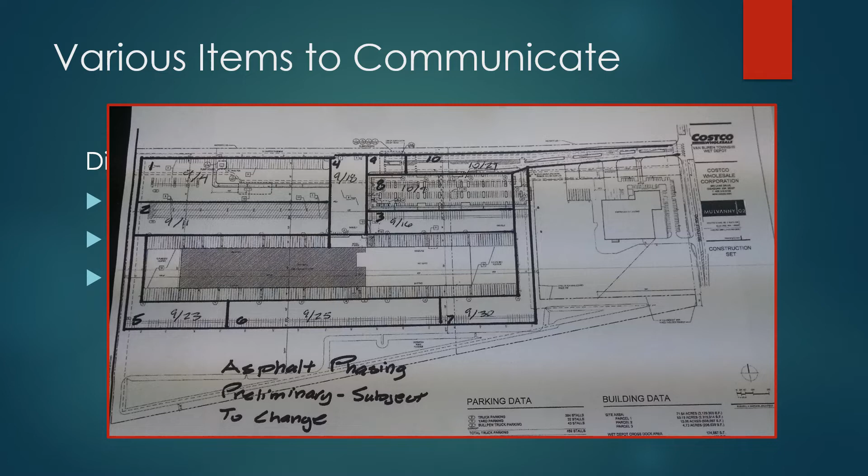Airfield projects are very complex, very complicated. A lot of details on exactly where the jointing plan needs to be between the top lift and lower lifts, as well as where the aircraft is going to be landing, and the wide shoulders, high-speed turnouts, and tarmac.

Our mannerisms are key. An awful lot of people feed off of how you stand, how your eyes are, whether they're focused or glossing over them and looking out to something else. Facial expressions tell so many stories about people. So do pay attention to others, pay attention to yourself as well, and work on proper body language and facial expressions.

Being dictatorial, probably not a good idea. Do as I say, not as I do. We are who we are. We do feed off of other people, though. But rest assured that middle managers and upper managers should lead by example, regardless of your position. I can never possibly state more emphatically that it's really good to lead by example. Don't demand respect. Learn how to command respect, and you'll be very successful in your career.

So again, varying types of motivation. Positive motivational skills is a learned process. Dale Carnegie provides an awful lot of excellent tips on this matter.

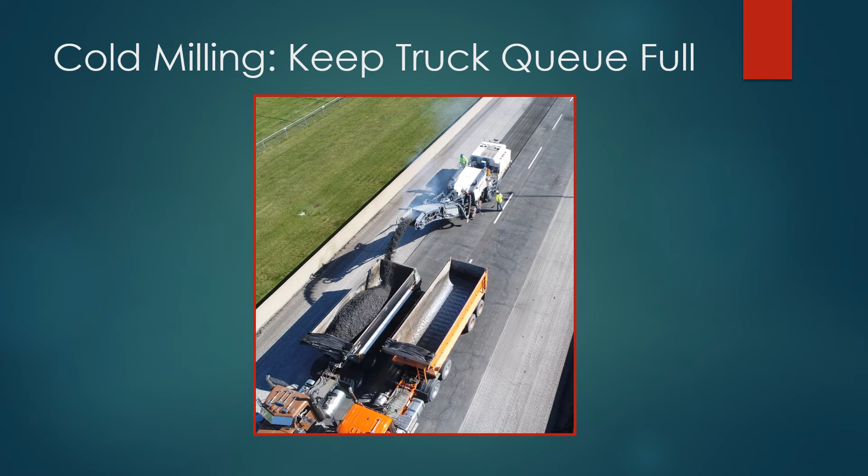To ensure that they kept the cold milling machine moving, they decided to pack their trucks side by side, some might call them in tandem. As the first truck gets filled with the millings or the reclaimed asphalt pavement, which will be taken back to the asphalt plant and reused, the second truck trailer that is empty is all set and ready to accept product, so that the cold milling machine never actually stops. They dial in the feet per minute they want to accomplish. They have a cut width, a cut depth, and from that we can determine how many trucks are required to keep the milling machine moving consistently.

Complementing that is the realization that in our industry, many specifications should really be nominal cuts and not exact cuts for milling. A nominal cut is going to allow us to use grade references on our milling machines, and we will be able to cut the existing surface so that the milled surface has a profile that is a significant improvement from the existing road surface.

Then we're going to follow this up with paving in a similar fashion, and that is how we're going to achieve the smoothest asphalt pavement possible.

So I'd like the engineers out there to remember that if you specify a 1.5 inch milling cut, don't expect it to be exactly 1.5 inches. At the low spots, it should be slightly less, and at high spots, it should be slightly more. I think it's important that on an average daily basis, the nominal cut is 1.5 inches, and we can perform yield checks to verify that.

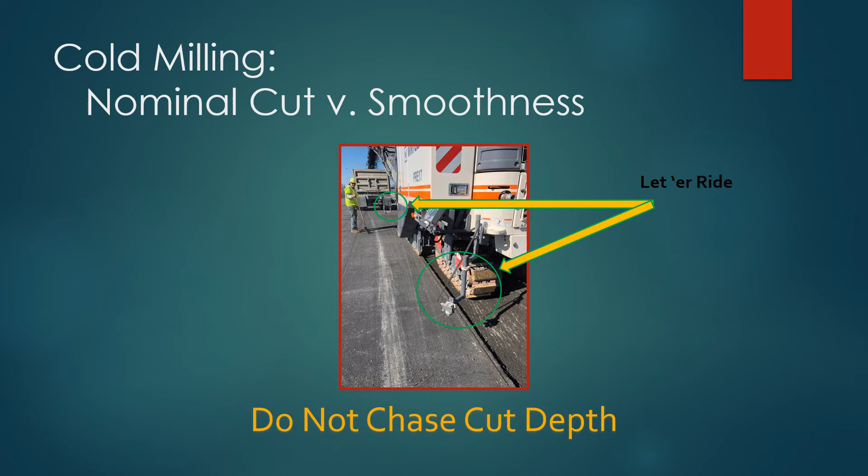So in summary, don't chase the cut depth, chase a nominal cut depth to be the most successful milled project.

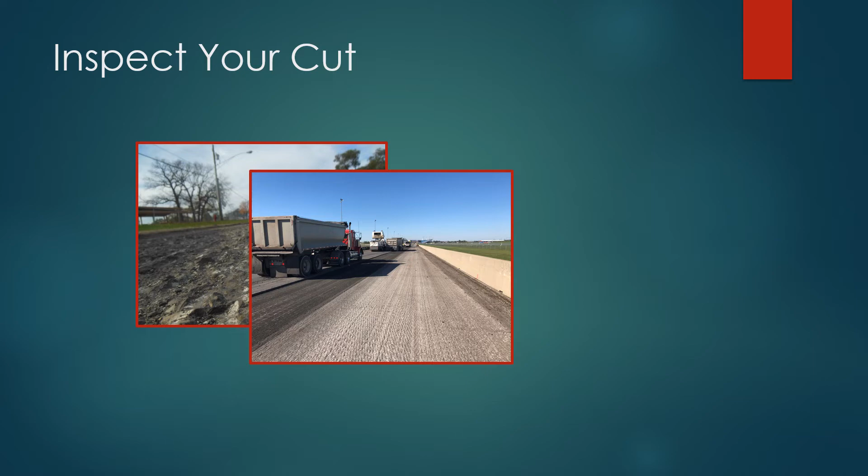This is an improved cut. It's not the greatest, but it's pretty darn good. The rotation of the head is mated extremely well to the motion of the milling machine, and then the trucks are there to move the product out.

And finally, this would be what you would consider an excellent cut. Many specifications around the nation have been developed to require this on mill and fill projects now. Whether it's a finer tooth milling head or the speed that the milling machine moves forward, any number of specification requirements can be stated, but the important part is to get a uniformly cut depth and a smooth ride as we drive forward - not to mention paying attention to the cross slope. This would definitely rate up there as an A quality type of milling project.

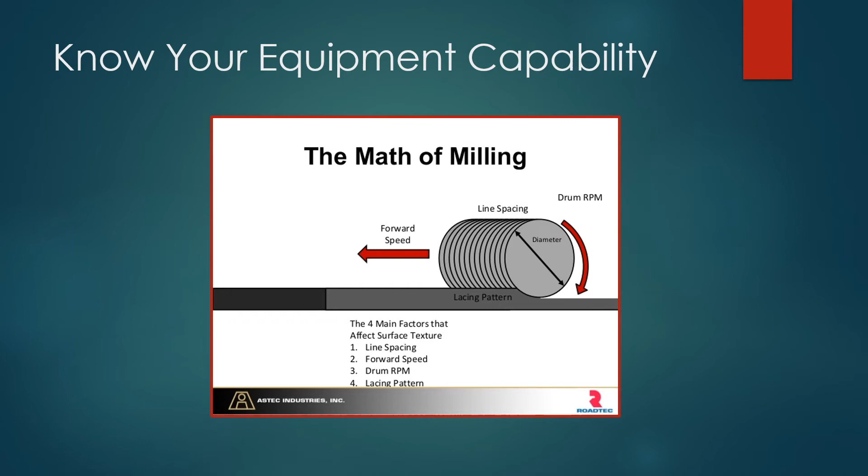This is from Astec Industries, in particular Roadtec. Many of the equipment manufacturers who make milling machines have a very similar slide to share with you to educate people who purchase their equipment. They provide great on-site training with the foreman and the entire milling crew, and they really do stick to the four main factors that affect the surface texture: line spacing, forward speed, drum rotations per minute, and the lacing pattern. Everything in fact ties into how deep you're going to want to cut the mill.

Here's an example, I think this comes from Wirtgen, on feet per minute versus the milling depth, and how fast and effective you can go to have an excellent job, provided you pay attention to the engine speed.

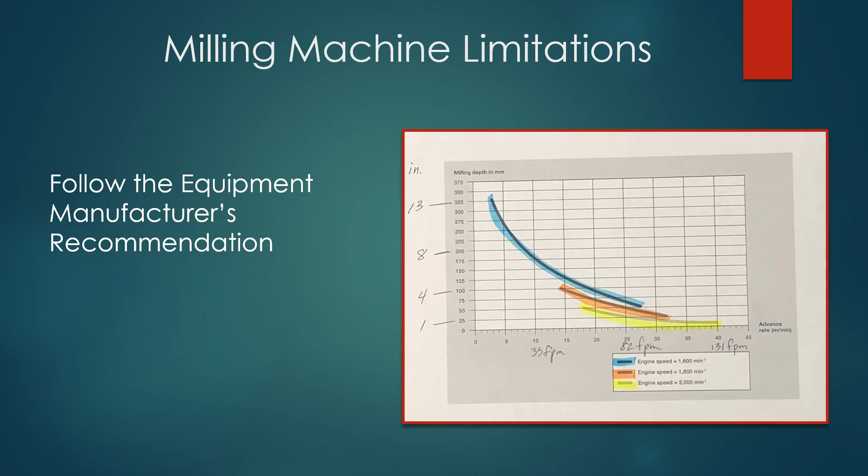Truck drivers: make them a key component. Explain to them the value they bring to the project's success, the importance of a safe truck, properly fueled, properly cleaned, and with a tarp on it.

A truck should stay in the queue and pay attention to how many tons per hour we expect them to bring, or how many loads per day, per shift. The truck driver needs to know this. Some vendors work their trucks 24 hours with different shifts, day and night. Some trucks, unfortunately, will haul asphalt during the day and gravel or clay at night, which leads to nothing but problems. So communicate the need for the truck, the quality of the truck, how long you'll need it, and the condition of the truck bed you expect on every single shift.

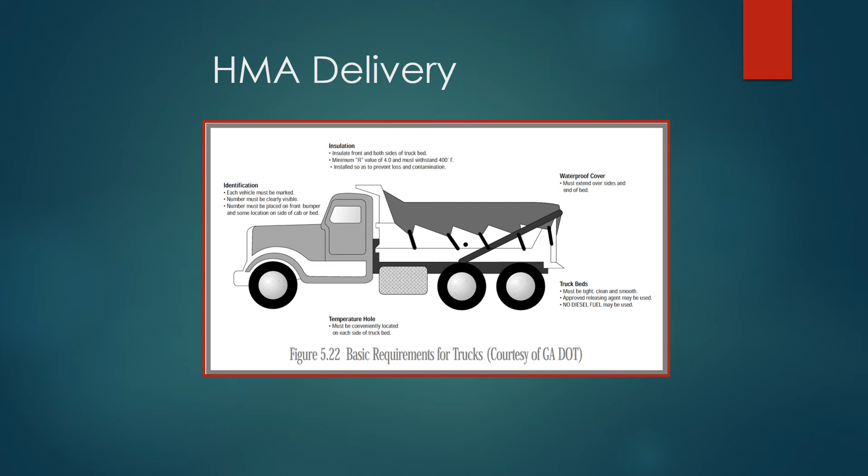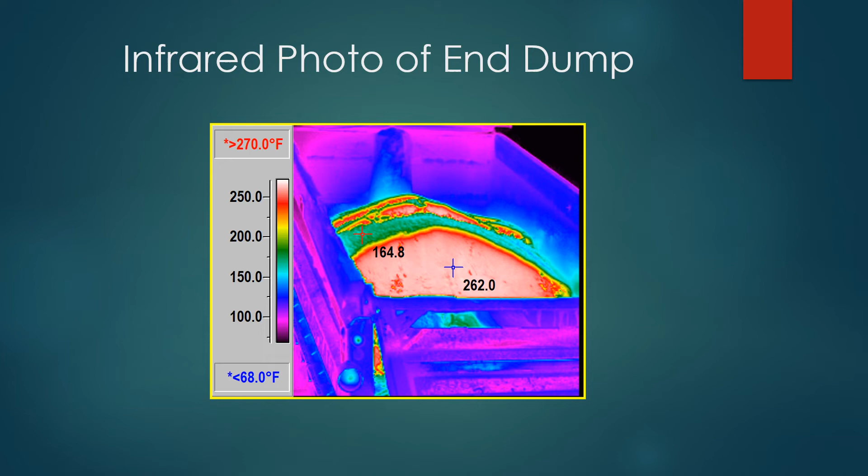A secondary infrared photo shows the truck on the right that wasn't tarped and the effect it has on the temperature of the asphalt mat after it's placed. You can see how those crusted spots travel through the paver and out onto the grade. The roller operator is already set up for failure because the temperature differential will lead to probably 2 to 5% variability in density. This is unacceptable, and it's why we need to continue working with technology, infrared photos to train the crews, and infrared cameras to document good work and pay for work being done.

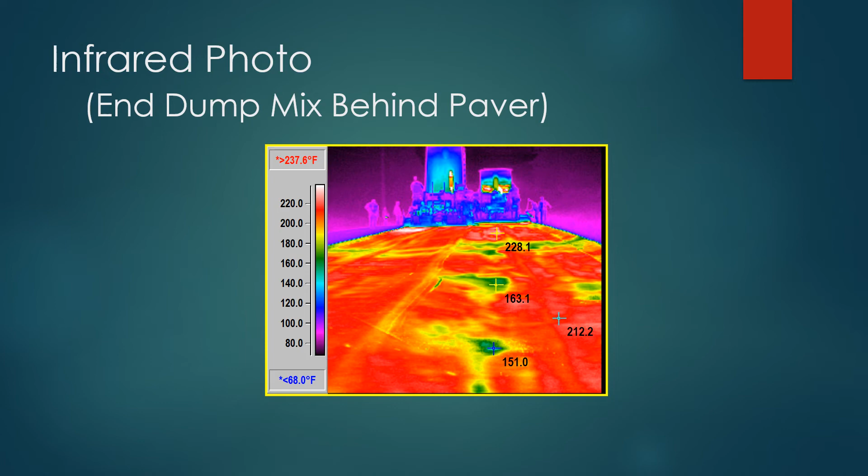That could be 1,000 miles away, and if I have access to the program, I could read exactly what temperature the asphalt is behind the paver. I could read the paver speed, and determine if the paver is cycling, going fast and then stopping between truckloads, because we will pick up a difference in paver speed, and the infrared camera will also pick up a difference in temperature.

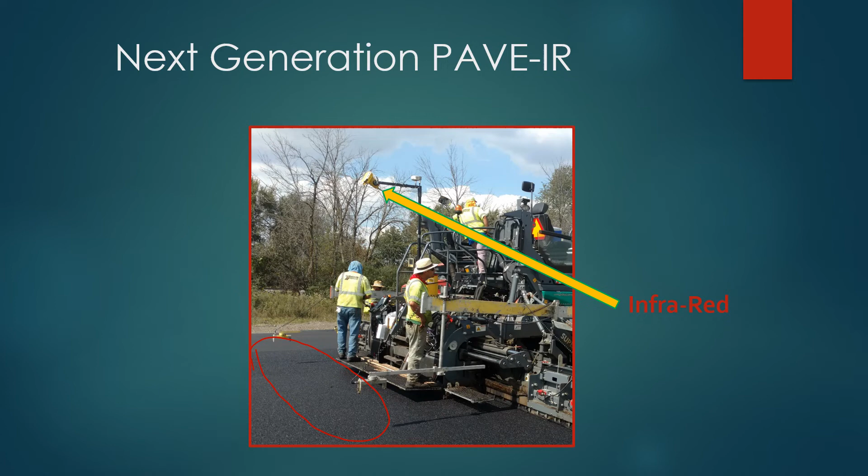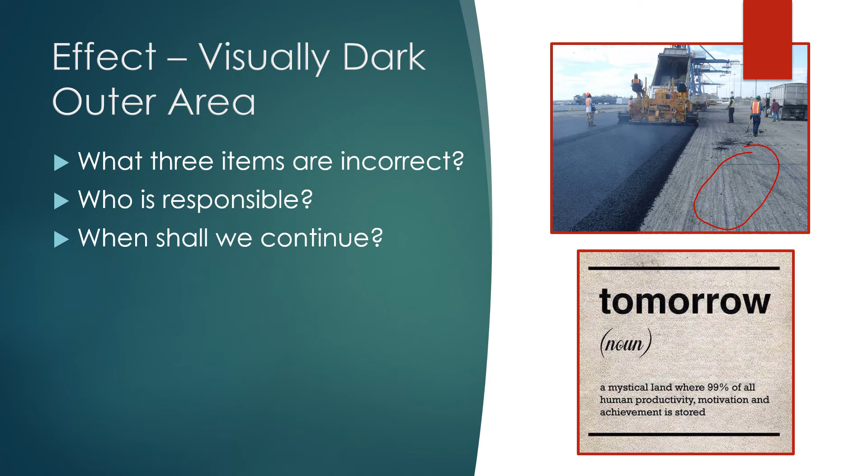What the infrared will pick up is thermal differentials, so this area is probably going to be somewhere around 50 to 100 degrees Fahrenheit cooler than the center of the mat. So we're going to have compromised density, compromised smoothness, an incredible decrease to quality.

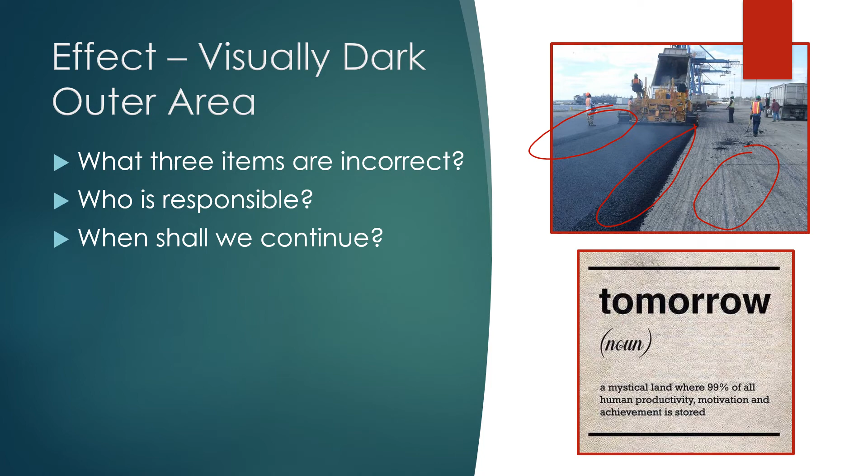Again, this is why new equipment is to be embraced and used. Whether you consider it to be a specification or not is the agency's choice. I think it's really a good piece of equipment for all of industry to at least consider owning and operating, if not on a trial basis, maybe for at least 1 or 2 of your paving crews on an ongoing basis.

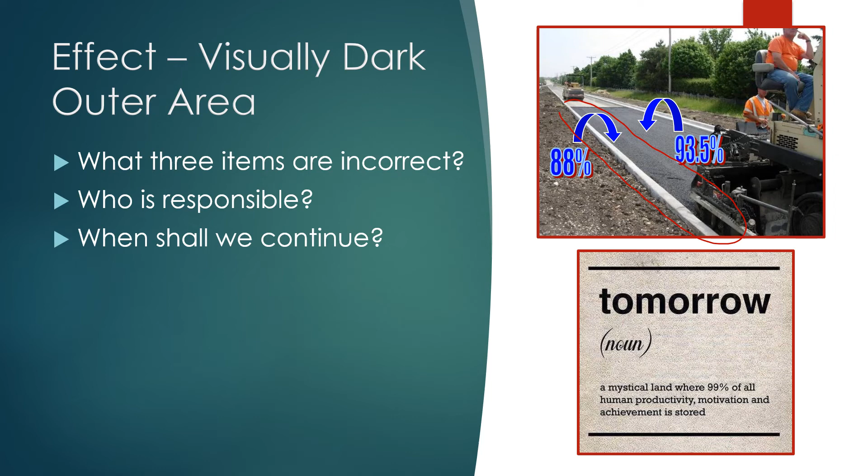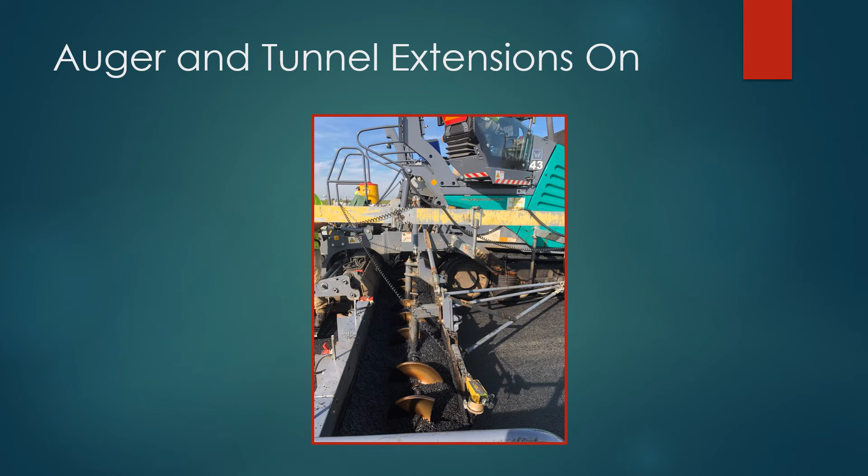Being part of a team is crucial to the success of individuals, and it's also crucial to the success of a corporation. But everyone needs to understand their role, so make sure you develop roles and responsibilities for all your employees. Ask yourself, do they feel respected? If not, how can you improve on it as the leader? Do they feel their contribution is important, or do you brush off what they say?

Think about what somebody's saying. Try to put yourself in their shoes. Close out meetings letting them know you value their input and their comments. Although we may not adopt what's being recommended for this project, we're certainly going to look forward to integrating it into future projects. It doesn't really cost you anything to be a nice leader and to help improve your team. We're trying to help each and every member of our team succeed, and we certainly want our clients to be successful as well.

Decisions are very important, but ultimately there has to be a leader. There might be some crazy ideas that come up, but ultimately a leader has to make a decision whether we're going to do this or not. What's in it for the company? What's in it for the client? In this particular case, the decision was made to give the smoothest pavement possible, to minimize joints, and to get the highest density possible.

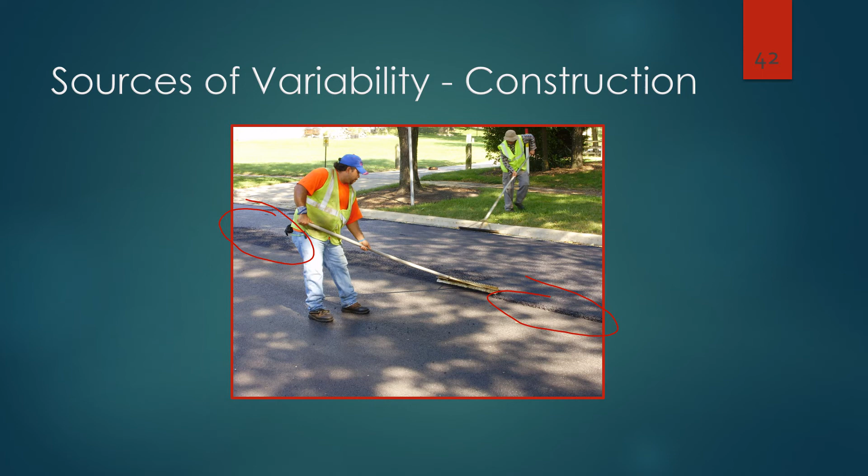In this particular case, the laborer only had to talk to the back end person and say, hey, put your end gate down, squeeze your end gate in, and let's line this thing up better with the existing mat so that we get an excellent paving seam.

This is a perfect outcome as far as I'm concerned. This contractor is doing an excellent job. The way they're successful is their first pull was straight and true, and you can see that off in front up here. Because of that, the rake is exactly where we want to see it. The lute should be used only when necessary at structures, and sometimes when we have slight undulations in the pavement, or maybe once in a while we have to crowd the material back. This is exactly what you want to teach your crew - less is more.

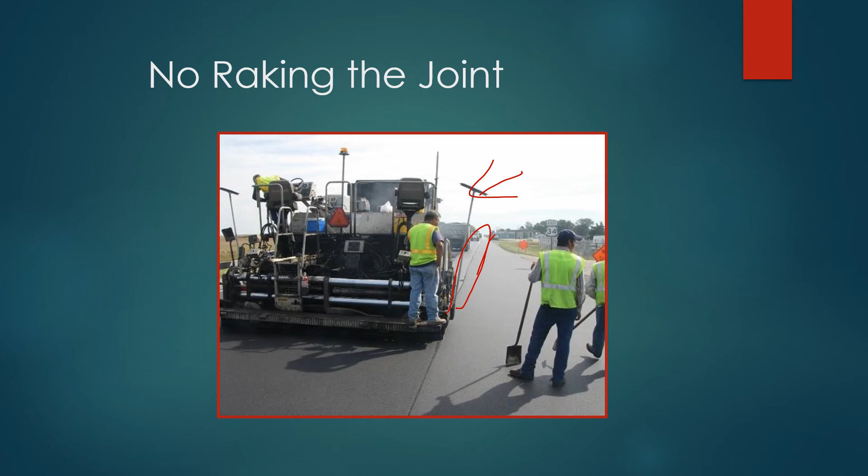Scheduling - not an easy job. Communication - you should really have a commitment to communication exercises throughout the season. We have to know what's happening tomorrow, what's happening next week, and our long-range plan. We have to have meetings that communicate these things, because we need the weekly dispatch and tonnage outlook, proper ordering of materials, proper scheduling of employees, making sure equipment's available, and certainly enough trucks to deliver the product from the asphalt plant to the paving crew.

Day and night projects: a beautiful way to kill a company. Although it's very difficult on almost every company and agency, the benefit of working at night is immeasurable. There's less traffic, production's higher, and the motoring public is not impacted nearly as much.

The tricks of working at night are obvious. You need to make sure you have proper PPE, good reflectivity, and lighting on the job site, controlling traffic and speed, and getting on and off at assigned times.

But the demand on the resources of an organization is very challenging when you have to work day and night. So do be aware of it. Try your best not to flip back and forth with a crew between days and nights. If you're going to lose quality and lose employees, that's a perfect way to do it.

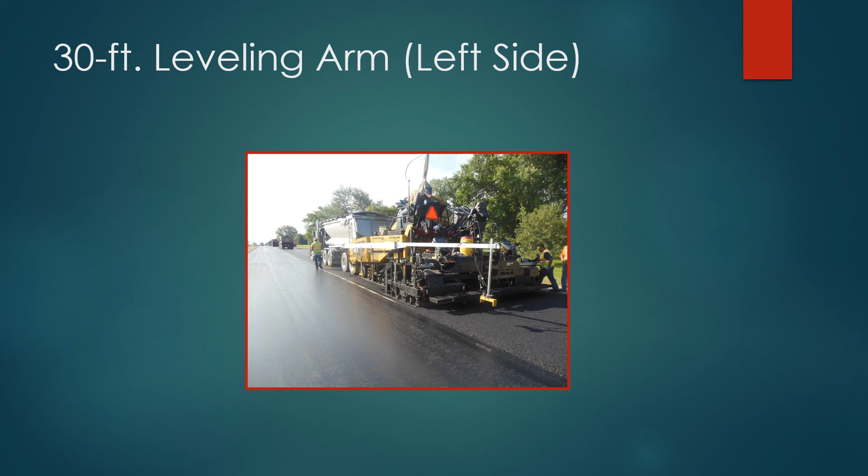Therefore, one of my strong recommendations is to not chase yield as much. Certainly, I have to build it compliant to the specifications. Again, similar to milling, thickness should be a nominal thickness. But one of the things contractors should do is look at the smoothness of their left wheel path versus their right wheel path and make decisions on how to build in the future.

One of the findings in the research was that the left wheel path on the data reviewed was always smoother than the right wheel path, anywhere from 10 to 100% smoother. That leads you to believe that instead of just trying to dial in cross slope, we should probably use two skis, one on the left as well as one on the right.

This might be challenging for some contractors or projects, but the reality is that on average, you can improve a roadway anywhere from 25 to 50% on the smoothness average of the two wheel path runs. So please look into that and make a conscientious decision to improve on smoothness.

Improving communication can continue throughout the year. Some wintertime exercises are, well, a good example would be World of Asphalt, ConAgg, ConExpo, National Pavement Exposition, and functions with the different universities and asphalt pavement associations around the nation. They provide an awful lot of opportunities for learning, working with your friends in industry, challenging each other to understand new equipment improvements, and making a Pareto chart of what your company was excellent at last year and where it fell down. We really want to focus on maintaining our excellence while improving the items we didn't do as well the following year.